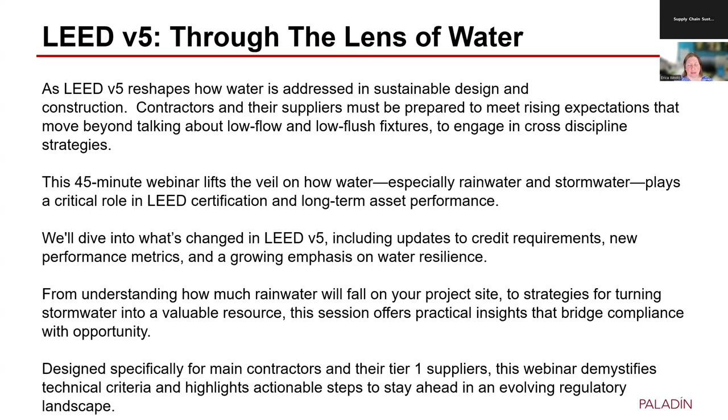So today we're going to talk about some of the key updates for version 5 and look at where some of the variations from version 4 are and how we would tackle those. Looking specifically at how the interrelationship between the water efficiency credits and some of our sustainable sites credits could be better utilized if we start having different conversations with some of those different project team members. And how are we looking at these meaningful water-related goals for LEED?

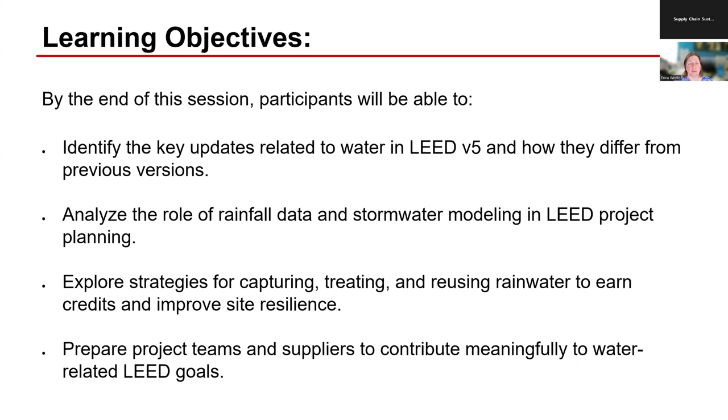Now, you're going to see on the LEED version 5 scorecard there is a tiny amount of points available for water, and we're trying to expand that and capture other creative ways to think about water, so that people understand it as a resource, a limited resource, and how we can best utilize this information we're gathering through version 5 and how we can inform version 6 in the future.

So there's a couple key things with LEED version 5 updates. If you've been watching, as LEED version 5 launched at the end of April of this year, there were a few key things that through the development process are really strategic. Moving to a 5-year development cycle, so launching version 5 in 2025, giving us a target date of 2030 for version 6, and 5 years beyond that for version 7. It gives us our runway to understand where the market is today, what kind of projects are under development, who's using what types of credits, how they're using those credits, and how they're best making waves, pun intended, to move the rating systems forward for the next versions of LEED.

Because right now, even though version 5 has just launched, we're already having lots of dialogue about how pilot credits will move the needle on potential version 4 and 4.1 projects right now, to get that critical market feedback from you all using the rating system, so we can better understand how credits can develop for version 6. This is really strategic and important because that market transformation needs that feedback from people using the rating system. If we wait for folks to register a version 5 project, say a really big multifamily high rise in New York City where Wendy is today, it might be 5 or 6 years before that project gets built. That's a lot of time before we can actually get that feedback. So how do we start creating a bit more of that cadence and understanding?

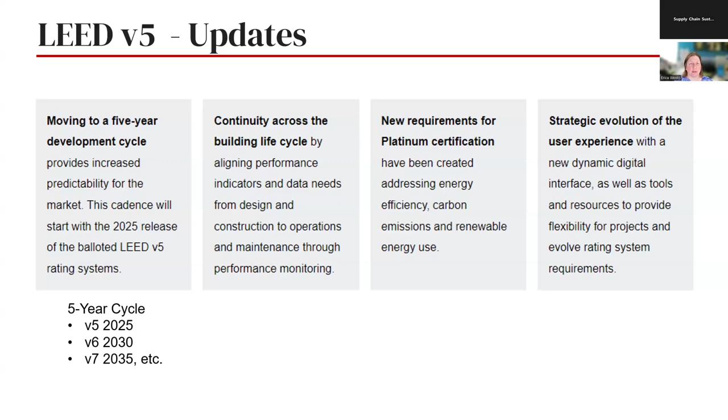Now, when we look at the key themes, you might be familiar with previous versions of LEED talking about the triple bottom line, or the three-legged stool, having environment, economy, and being able to have that synergy between the middle of those three spheres be that sustainable development. In LEED version 5, new lenses were utilized to look at the characterization of certain credits and points.

50% or so of the points are looking at decarbonization strategies, and these could be everything from specific things related to energy, but looking at embodied energy of materials, looking at refrigerants, looking at transportation, quality of life. How are we designing projects and buildings that are actually supportive of people enjoying where they're working, enjoying where they're living.

Not just making those environmentally friendly, but actually making those a place where people want to save and preserve. And then specifically 25% of the points being about ecological conservation and restoration, being specific about how we're looking at our ecosystems, not just of our project site, not just of our parcel that we've been assigned to look at, but what that development on that parcel is actually impacting the greater neighborhood, the community, the watershed.

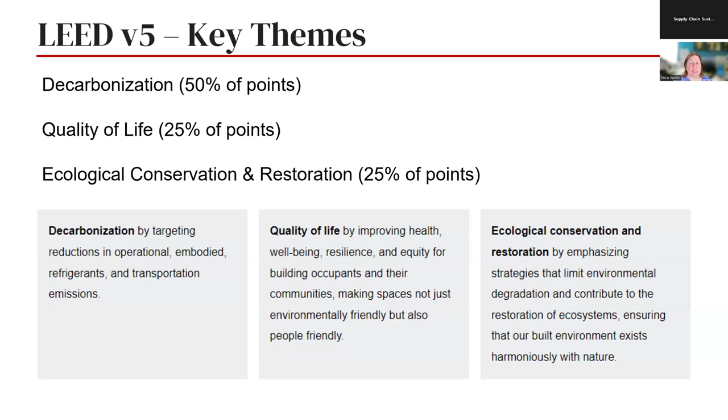Are there things we should be thinking about in that broader context without just looking at what happens within that little parcel of what we can develop? Are there things we can improve upon or make better for our neighbors downstream? And this all ties to how the new scorecard has been developed, understanding where different impact areas, where these key themes tie to certain prerequisites and points.

Now, if you're familiar with LEED version 4, this is a very familiar scorecard to you, especially if you see my little indicators on maybe some version 4.1 upgrades that have occurred on this particular scorecard we just drafted here. Keeping ahead of understanding what credits you've done in the past, what prerequisites require, and how those are moving forward, you're not going to see a ton of change in some of the parameters around some of the credits, and in other aspects you're going to see some really exciting and great enhancements.

To particular credit strategies, you're still going to have prerequisites. Those are the required, always given, have to do them, do not pass go, cannot do LEED if you don't meet those prerequisites. And then you're going to have those points, those credits that earn points basically at a scale.

Specifically today, we're going to hit on a few topics, particularly for water and the water efficiency category, and how it's adjusted a little bit as we move that needle forward.

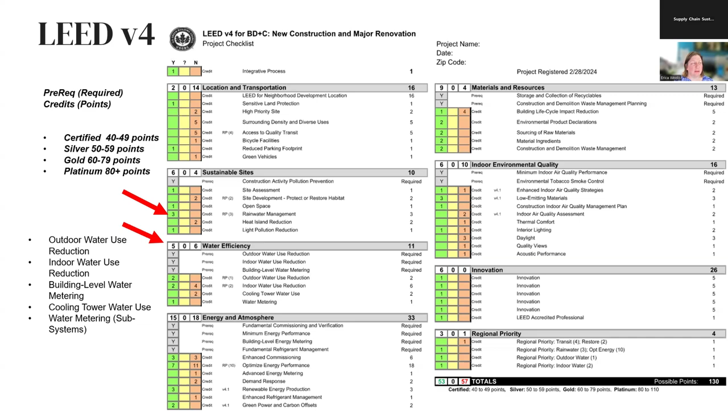So on the version 5 scorecard, you will see little indicators for that decarbonization, quality of life, and ecosystem conservation restoration as you work your way through the credits, to understand how those lenses, those ideas, are infused within particular prerequisites and credit language.

That's really important to think about, because if you're also doing a larger strategy session with your client, they might lean into one particular zone of thinking, or that lens, versus another. And you can use this as a quick guide to understand how you might be able to impact them in ways that might be a new way to measure things, from how many people are being productive, or how many people are loving that workspace.

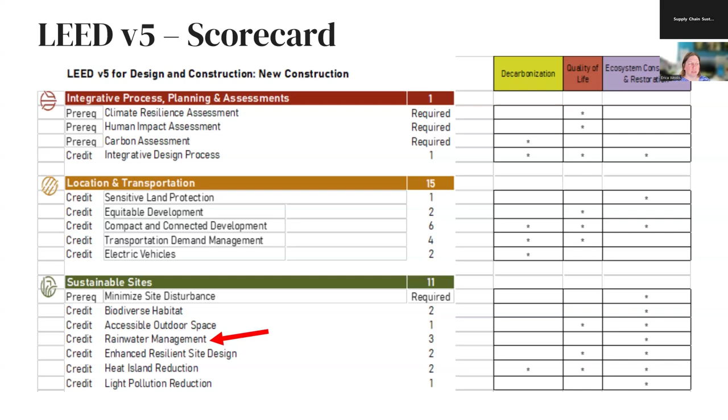Particularly today, I'm going to talk specifically about the rainwater management credit, which is still under sustainable sites, as well as cover the items in the water efficiency category. You'll see that there are 2 prerequisites still in the water efficiency category, and we'll go into detail and talk through some of the different credit language surrounding those.

I do encourage you to look at the scorecard in full. Like I said, there are many enhancements, again moving that needle forward, trying to push that bar to understand where people are at today, and how do we get them to think about things in the future. One key thing I think that's interesting is also just thinking about how all of these credits can knit together.

For example, when you're thinking about your material selection for your particular project, you may want to start to consider how that material, not just from an energy standpoint, but how that material is also utilizing water within its process and how it's being made, and understanding at a deeper level how this could impact what we see come out in version 6.

A little bit more on the scorecard: you'll notice there's a new project priorities and innovation category, which bundles together what was before the regional priority credits and the innovation points, where you could pick from the innovation point credit catalog versus come up with other credits from other rating systems. This was a strategic decision to let people think creatively within their local community, their local geographic region, about things that are a concern, to write their own credit as well as use a credit from a library of innovative or exemplary performance items.

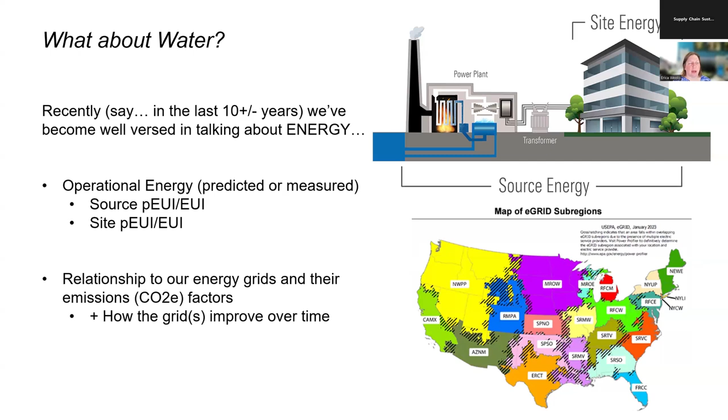So water, if you look at many of the municipal reports in many areas of the United States, the amount of energy and utility costs that your local water company pays to create potable water for your use and consumption at your building goes through a really laborious process of cleansing, pumping, collection, and re-cleansing.

Each step of the way, it takes energy to get you to that point where you have potable water service. I anecdotally like to tell people I saw a dishwasher tab commercial enticing you to wash your dishes even if your dishwasher wasn't full every night. Go ahead and pop that tab in and let it run. Well, my dishwasher doesn't know if I have two dishes in it or a full load, it's still going to use the same water. I realize there are some other kinds of dishwashers with more complexity, like drawers, that might be able to run a half load.

But I started to dig in and feel really bad when I understood how much energy, how much carbon, I was using, even if I was only using 4 or so gallons of water to run that dishwasher load empty, to get that water to my house, being 8 or 9 miles from our local water plant.

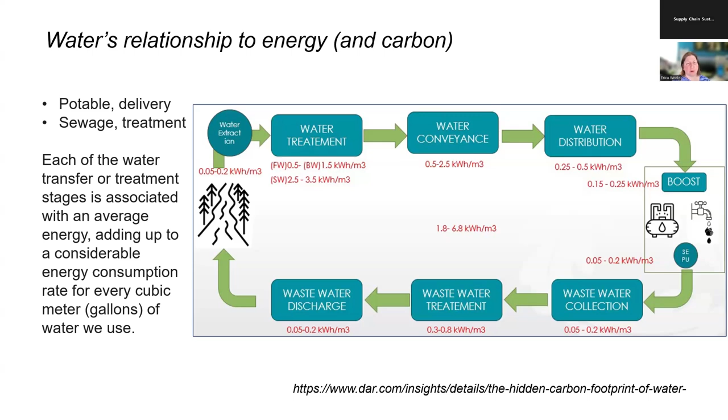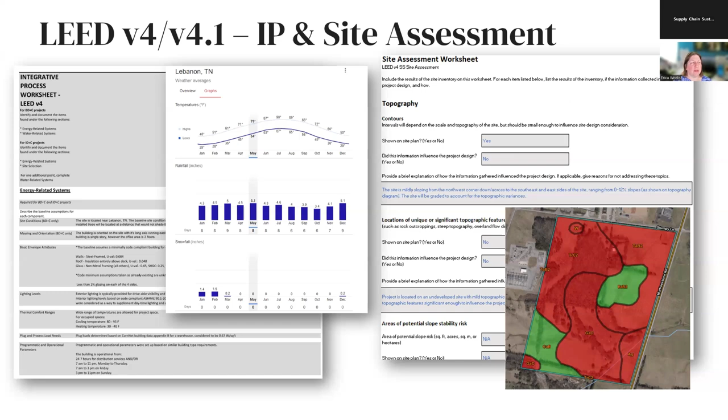This included being able to associate how much water could be infiltrated on your site, how much water could run off your site, and how much water could be collected and reused on your site. This remains in LEED version 5, as a way for you to start your conversations about your rainwater management credit.

So in LEED version 5, very similarly to version 4 and 4.1, we are trying to reduce any runoff from our site, being able to capture on site, infiltrate, use that natural hydrology, use that water in some other way based on percentile storm events. Those percentile storm events are a little bit different than thinking about your annual or monthly rainfall.

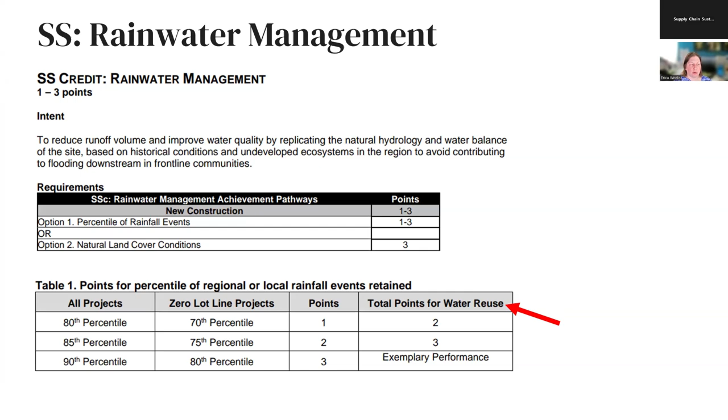But what LEED version 5 is also looking at is giving you a bonus point for water reuse. If you're actually capturing and reusing water on site, you might be able to capture a certain percentile storm event and get a bonus point, an extra point, because you are reusing a quantity of water based on that calculation. The percentile storm event calculation hasn't changed.

It's still looking at your 10-plus years, or ideally 30 years, of precipitation data, and running the percentile calculation into the calculator that tells you what your percentile storm event would be. Here in Middle Tennessee, a 1-inch storm is typically the design standard from a percentile storm event perspective. So I'm often asking my design teams, can we look at that 1.11, getting up to that 85th percentile storm event, which is different than looking at your monthly precipitation.

You have the ability to look differently at what you might be getting on a monthly basis, from a volumetric standpoint, that you can then collect and reuse for things like toilet flushing or irrigation, and how that aligns with your project's water usage needs.

So again, a very good activity from a site assessment standpoint, starting to think about this calculation before a lot of design has gone into where the parking lot is, where the parking garage is, where the building placement is, and how we can start to think about these different volumes of water in ways that give us the ability to have the conversation about reuse.

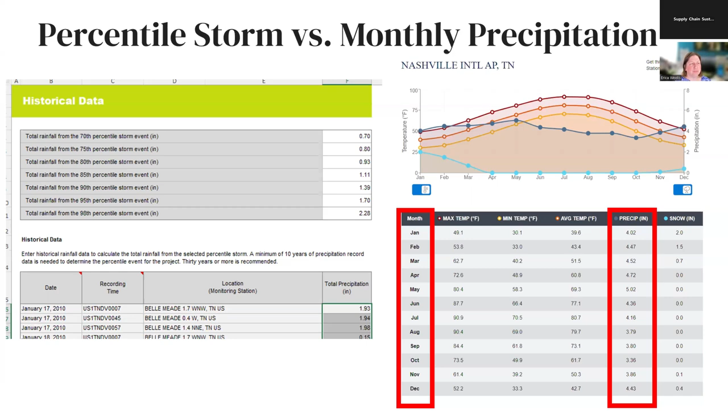So this is important for that rainwater management credit, but it very much ties to your water efficiency credits.

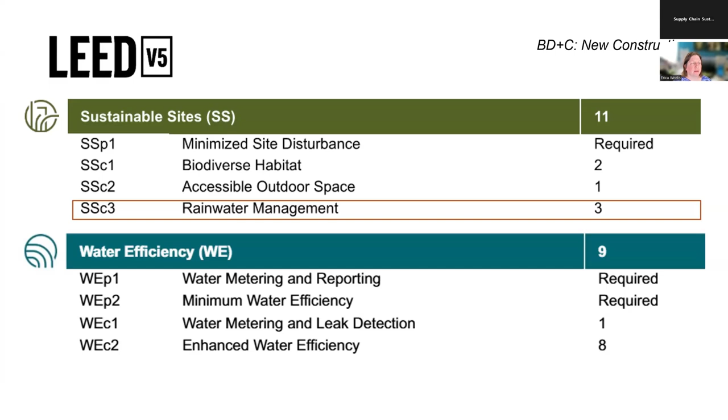Similar to version 4, you are going to have the requirement as a prerequisite for whole building water meters, to be able to understand that total consumption of your building water. And that total consumption is not just the building, but the associated grounds and any other uses you might have. This hasn't changed. This has been in version 4 and 4.1, with the commitment to share that data on an annual basis as needed via the spreadsheet or through Energy Star Portfolio Manager when you add USGBC to your account, and be able to understand at that holistic level how much water you're using. That does tie to another credit we'll talk about in a minute.

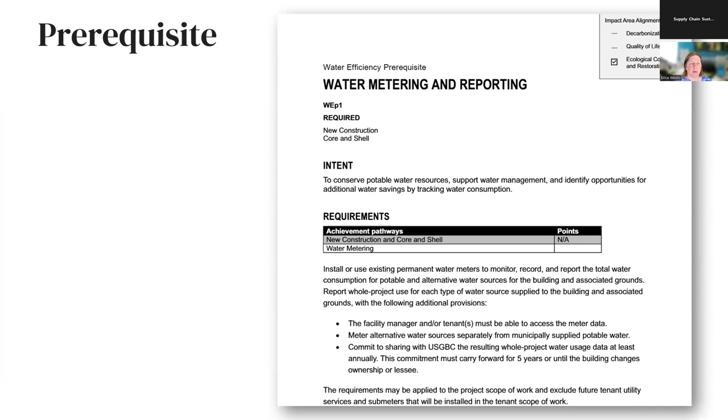We're again looking at subsystems and understanding maybe some of your different water end uses.

Now, where the big change has happened in the water category for version 5 is optionality to how you might pursue the prerequisite as well as the credit to earn those potential 8 points for being water efficient. A lot of the conversations through the development of version 5 were: is prescriptive good enough, or is performance good enough, or should we still have both? Because there's obviously a lot of different project types out there that would need perhaps some different ways to understand what a hospital needs versus what an office building needs versus what an industrial project needs. Giving people the optionality of looking at some different pathways to hopefully understand what they're designing and then implementing was a big discussion and a big collaboration of how people are earning these points today and how do we move that needle forward.

Because again, we want to talk about not just flush and flows. We want to talk about all the water that's being used in your building, and how the building grounds, how all of that water could be associated.

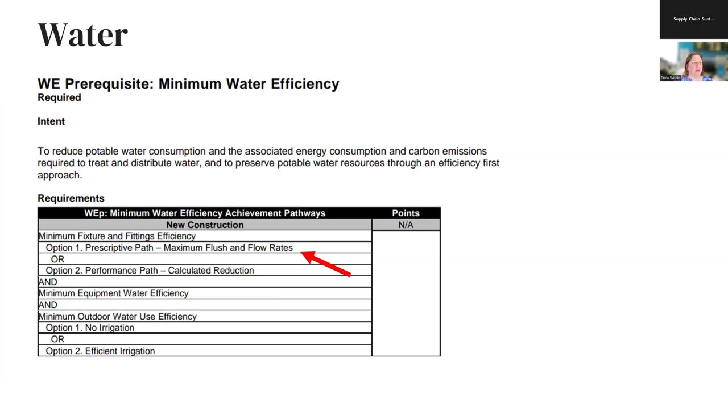So when we look at the prescriptive path, which might be from a prerequisite standpoint an easy button for projects that might be a little bit more straightforward, not a lot of process water use, things that you would just pick. You would tell the folks who are picking the plumbing fixtures, here are the target levels that we should be looking at, here's what we need to meet from a specification standpoint.

Or you can still do, as we can today in version 4 and 4.1, a calculation based on performance, looking for that 20% savings with the mix and match of the fixtures that you have and that you are looking at. Again, it might work really well on some projects, like a healthcare project that might need a little bit more water for hand washing per the authority having jurisdiction, and we can save some on the flush rates, or vice versa.

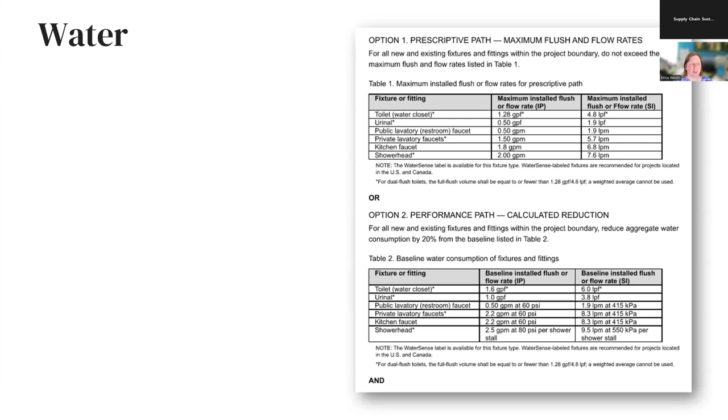So again, that little bit of mix and match versus just being prescriptive. There's some other criteria to the prerequisite, but allowing for that optionality was really important as we then elevate to the enhanced water efficiency credit, where you can earn up to 8 points.

Now, if you look at the version 4 and 4.1 credit today, we have a percentage of thresholds that earn a point based on you meeting 25%, 30%, 35% — those different pieces of percentage savings based on your fixture combination. But what that's not doing is also looking at other water uses in your building.

So as we're thinking a little bit more holistically around how we're going to drive the carbon metric toward understanding how much energy, how much carbon, how much we're expending to get that potable water to our building, we just can't be talking about flush and flow rates on many projects. We have a lot of process uses, we have HVAC uses, we have things that are consuming a lot of water that aren't necessarily just our flush and flow fixtures.

So what the new credit in version 5 has done for enhanced water efficiency is given us, again, options where we're going to look at the whole project water use. So looking at every water-using system in the building, combining it all together. You're looking at your irrigation, your HVAC, your dishwashers, your flush and flow fixtures, and bundling that up.

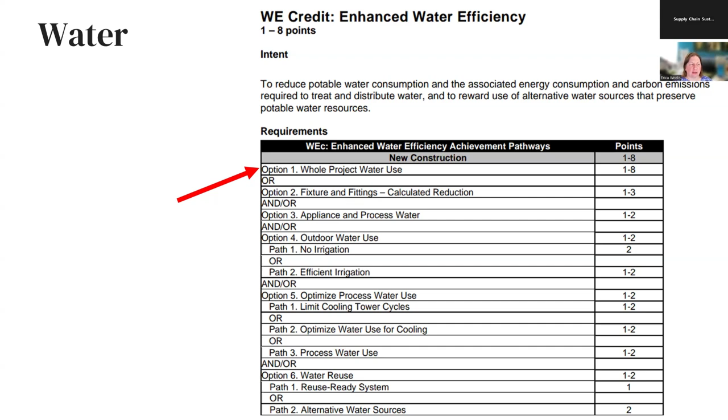This is a decision point for a particular project that might have appliance process water use. Maybe there's a heavier usage for some types of equipment, maybe a heavier usage for irrigation, and having the conversation about which path to follow. At the end of the day, you're trying to save water, right? You're trying to figure out what your total water use would be for the building. But this gives you that optionality and flexibility to understand where projects would be able to comply.

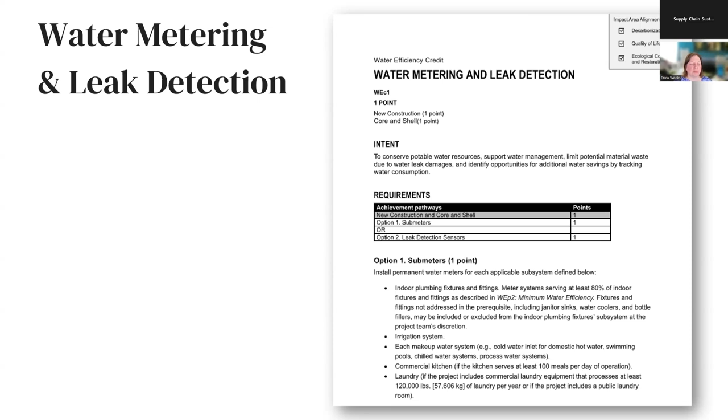The 1 point credit for metering and leak detection - you can actually earn an exemplary performance point if you do both options. This walks you through sub-metering, similar to what's in version 4 and 4.1, from a system standpoint. What systems do you really want to isolate within your project building to get a better handle on your water consumption, and understanding how that information would be useful to the building manager, to understanding where that water source is really coming from - if it could be alternative versus if it has to be potable. That kind of project-specific information gathering would be really great.

And then leak detection - a lot of times the most water we lose is understanding where things might be going awry, and how you're either looking at how much water you're using for different systems from a leak detection standpoint, or being able to look at abnormal flow rates.

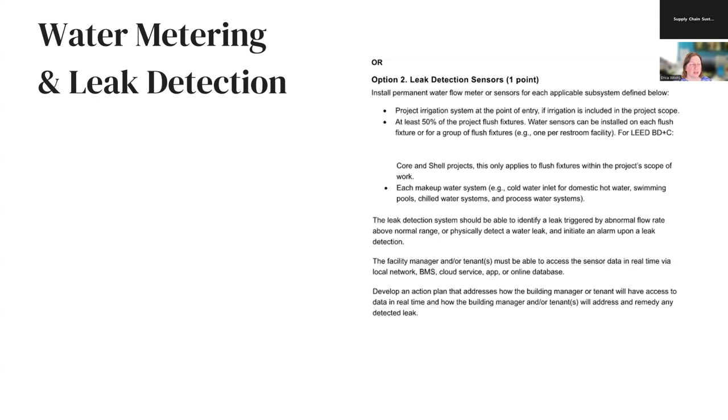I'm pretty lucky here in Middle Tennessee - if my water utility sees that I've had a big spike, they call and say, we think you're using a little bit more water than you normally would based on your historic trend. Is there something going on? Do we need to send somebody by? The two times they've called, we've had a leak out by our meter in our yard, so we've had that corrected. But without their sensor detection system out by our meter, we wouldn't have known - we just would have thought we had a higher bill. This is something where we want to not waste that water; we want that water to go to what we need it to go to. So having the ability to understand that information is really important.

Circling back just a little bit on the enhanced water efficiency to unpack that more. I already mentioned that whole project water use, that 1 to 8 points, could be your entire calculation, your entire amount of water use on your building. So if you have a really efficient process system and your process engineer gives you a 50 or 60% savings, maybe that's where your water points are going to come from, versus bundling up some of the other options together.

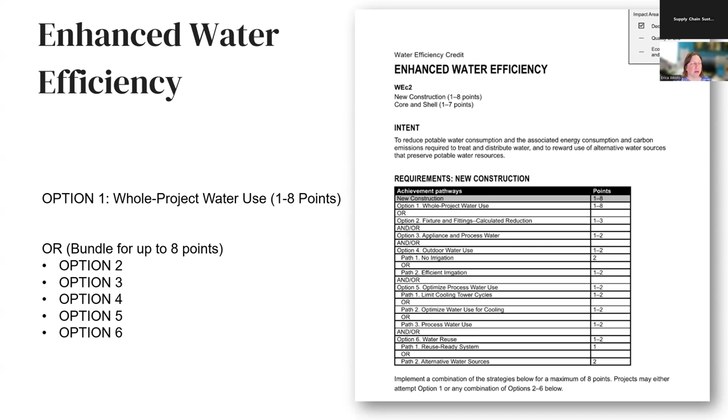The point scale for option one typically reads as 20% for your prerequisite savings, then a scale of 30 to 65% for exemplary performance, inclusive of if you're going to have some alternative water uses.

Alternative water—we debated on several fronts how to define it. Meaning it could be rainwater collected on site and utilized, or it could be condensate water collected and reutilized. It's really about how things are creating water that we can then collect and reuse. We landed on the word alternative versus other choice words out there, trying to align with other industry standards that talk about the use of alternative water, and also how, as the industry moves forward, we understand where we can reutilize these water-based systems in a more enhanced or commercialized way, leaving it flexible so we can understand where you grab that water from and how you're reutilizing it.

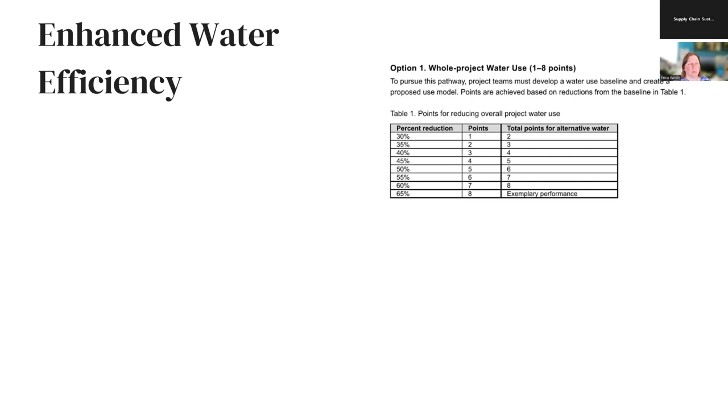When we get into option two and start going through the picky parts of how to earn a few different points, maybe adding up to 8, this is where we're talking about everyone's favorite flush and flow rates. Something easy to understand, something that can be specified, something we can use at a building to wash our hands and flush the toilet and understand from a performance standpoint. We like the performance of those particular flush and flow rates, and allowing that calculation to happen independently just for those fixtures and fittings.

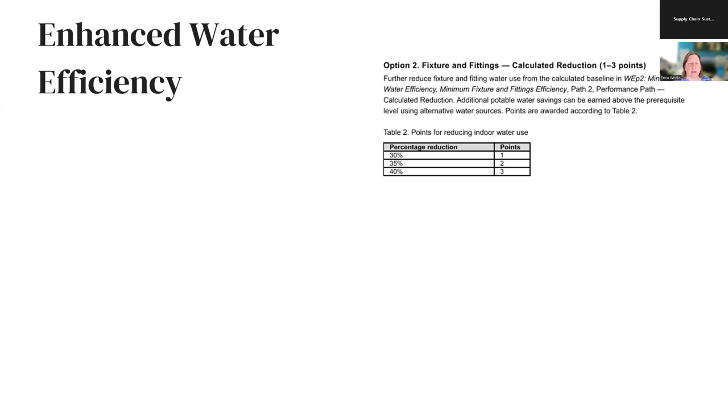Allowing for outdoor water use—there's a big change here in the way the calculation is done. For those familiar with version 4 and 4.1, we've typically used the WaterSense EPA calculator that allows us to look at plant types and the different types of spray heads and drip irrigation. The theoretical irrigation requirement is a different way to calculate the amount of water that is needed.

They'll be publishing a new calculator. We've tested it out on the tag side, taking historic projects and putting them in to see what the threshold is—if you're still at a 50% savings or at a 30% savings from a 50% savings. So just note that to get that 50% savings, you'll be looking at a deeper dive into how efficient your irrigation system will be, versus just basing it off plant types and other criteria you've looked at before.

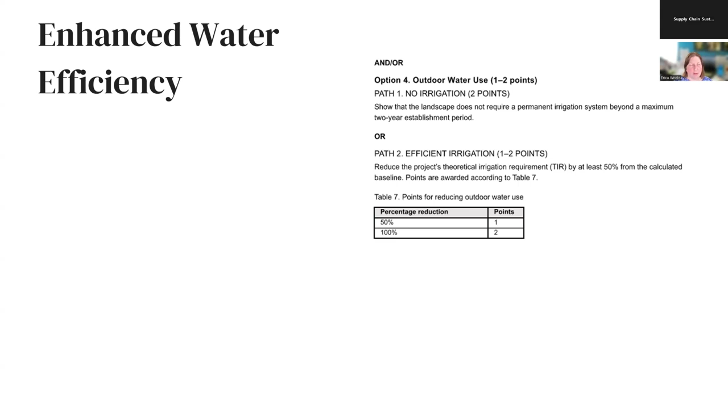Then looking at process water use—this is for those familiar with version 4 and 4.1—for cooling tower cycles and the concentration levels of different components that happen to be in water, which may change the type of chemical treatment or the type of cycling. Still in this version of LEED, it's possible to get 1 to 2 points depending on the number and type of concentration that allows for the number of cycles available. The complexity here is actually just getting that water test to understand what the water analysis allows for as part of the design of the cooling tower.

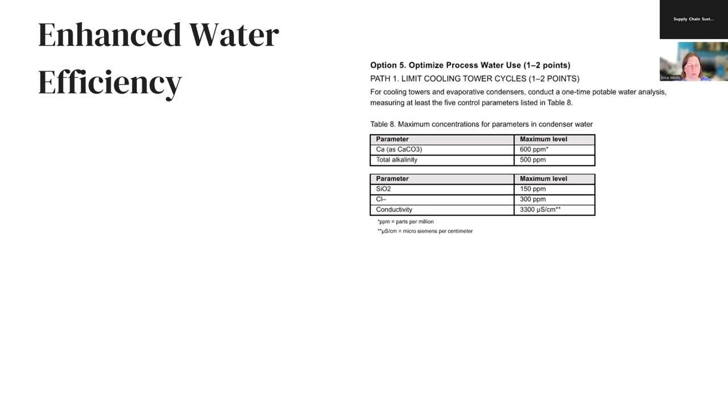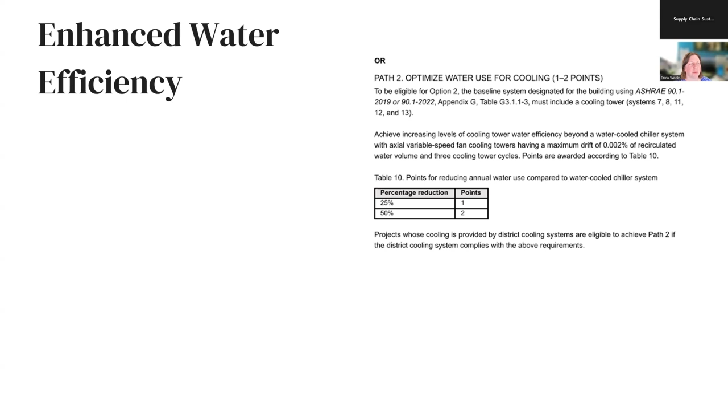There's also an option where, if you don't have a cooling tower or if the cooling tower is a different system, you're allowed to look at a few other minimum drift criteria, which we've had in version 4. We also look at different water-cooled chiller systems—things like this depend on whether you have it on your building. So from a strategy standpoint, if you don't have a system 7, 8, 11, 12, or 13 per ASHRAE, this may not be an option for you, and it might limit some of the points available to get.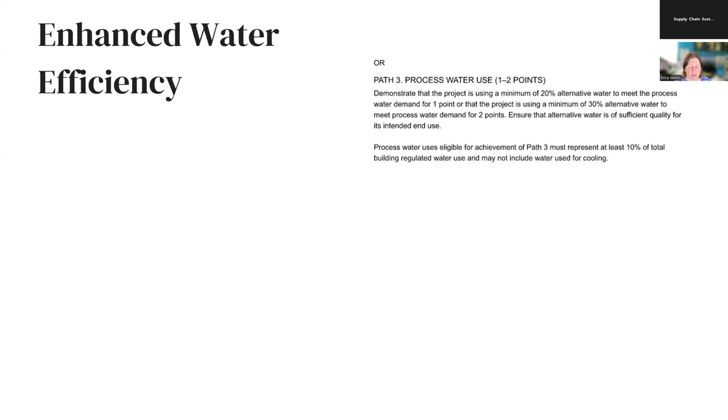Similar to what's in 4.1, if you're using alternative water for some other purpose in your process water—especially for a boiler or some other process available to you on your project site—using that alternative water can also achieve additional points based on that process use. And not to leave alternative water out altogether, there's also a 1 to 2 point option for having the ability to potentially use alternative water in the future, meaning you can have your building set up to connect one day.

For example, we work a lot in some states that have purple pipe systems, and that purple pipe water is able to be connected to things like flushing toilets or a cooling tower. If you know that's coming—a lot of California regions are talking about their recycled water systems—we wanted to leave that open for people to have the ability to potentially connect in the future. Then also, as you use alternative water on site, you can have your irrigation, your flush fixtures, any makeup water that's needed, and go ahead and get rewarded for using that alternative water right away.

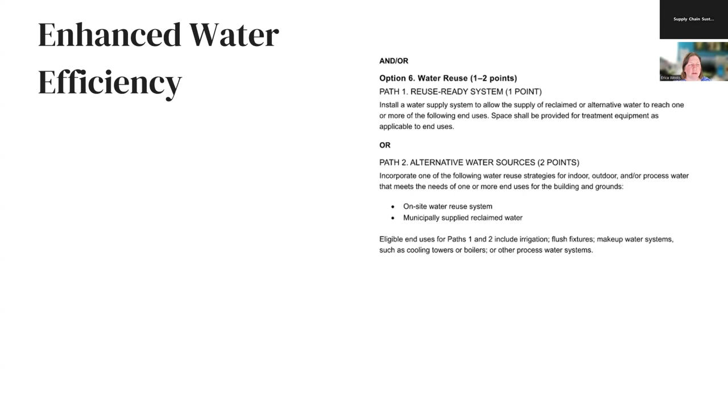So that is the LEED version 5 water category. I hope this was helpful, at least as an overview to folks online, to understand the credits a little bit more and understand there are some deep conversations that should be had pretty early on to understand what systems and what ability you have to perhaps capitalize on some of these points in a different and new way than just talking about your toilets and lav faucets.

So I don't know, Wendy, were there any questions? Hi, I'm back. No questions in the chat. I think I had a couple questions that I just wanted to raise really quickly.

So, we talked a little bit about how the point system has gone down slightly from LEED version 4 to version 5. Do you see it going back up for version 6? Do you see water taking on more of a role in LEED in the future?

It depends on how much we arm wrestle some of the other groups for the points, because there's such an emphasis also on energy and materials. There were some shifts made to capitalize on what the industry is very focused on—materials—and the industry has been very focused on energy. So I would hope that for version 6, especially as we begin to connect and tie a lot more of our water use to the carbon side, we'd need people to do that total water accounting and understand all the water they're using to be able to move that needle, to understand what is the carbon metric associated with that potable water, to then help encourage more alternative systems. So we hope in the future there'll be a little bit of shifting between how those points are allocated.